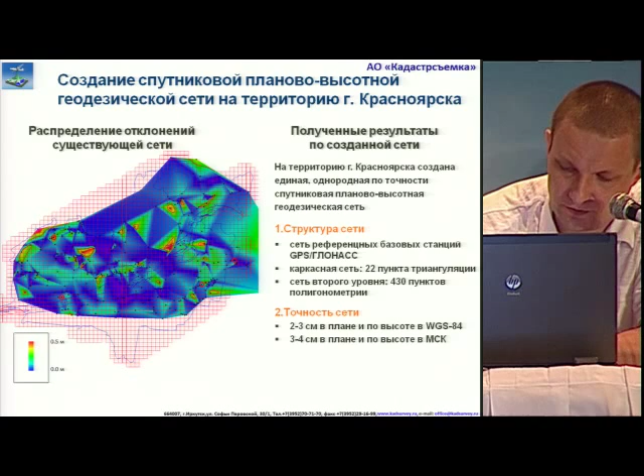To address these tasks, several activities were carried out. Initially, a satellite-based height model was created for the city. So this started with creating and making orderly the geodetic network. We can see the area distribution of ground control points. There were only 450 points, including 22 third grade points.

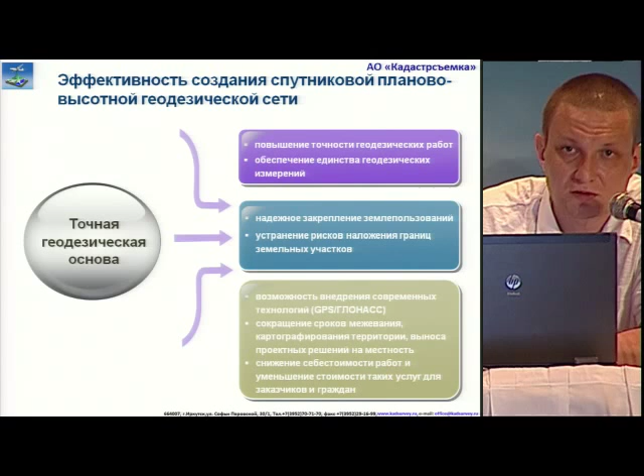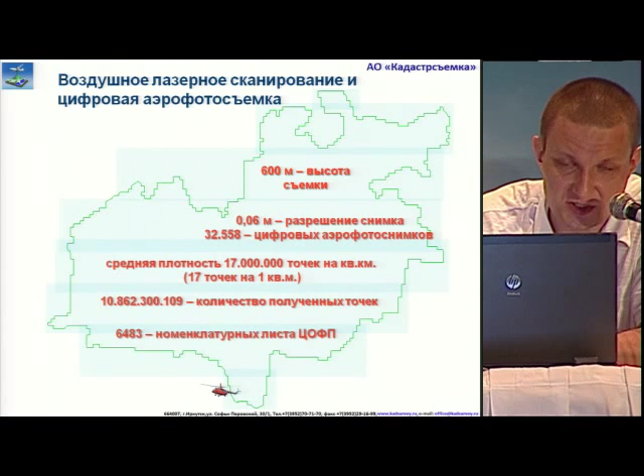So creating a single geodetic basis enabled better accuracy and quality of all geodetic efforts, reliable securing of boundaries of parcels of land based on GPS GLONASS technology. Aerial laser scanning of the city was carried out at a height of 600 meters. 6 centimeters was the resolution. Over 17 million points per square kilometer on average. So nearly 6,500 map sheets were generated.

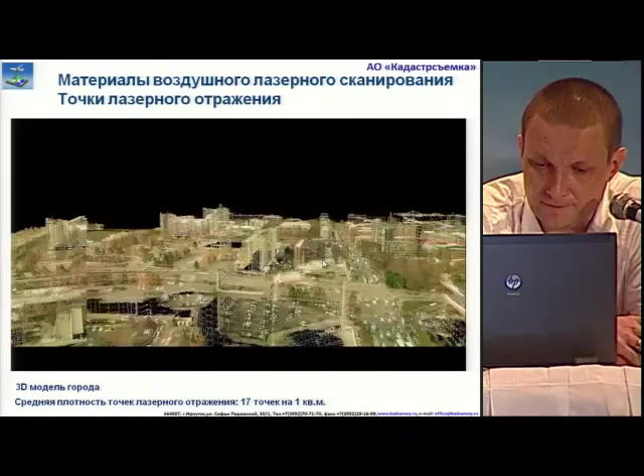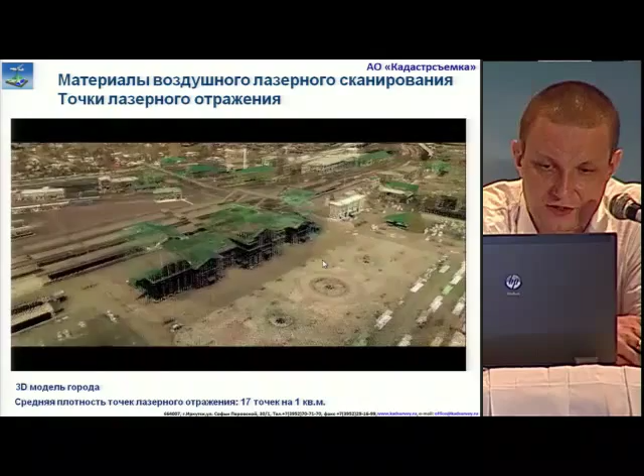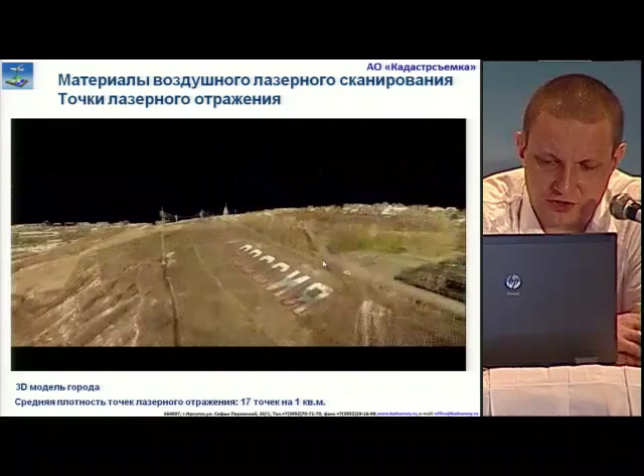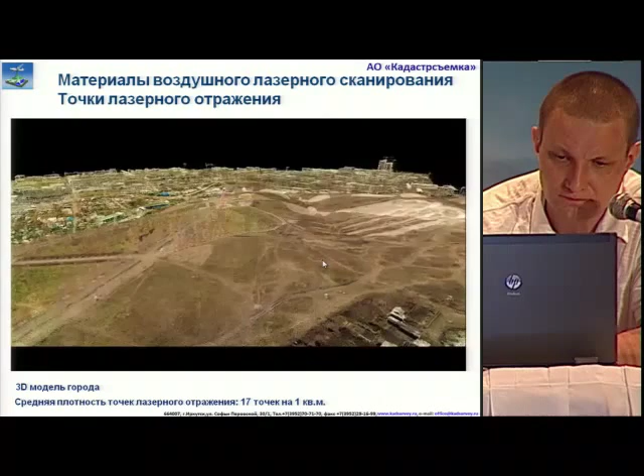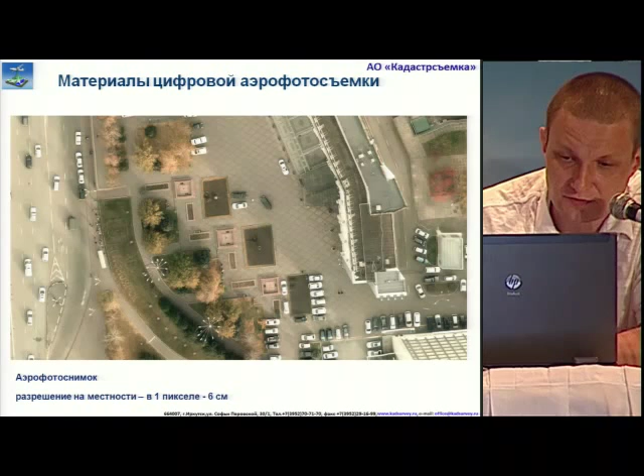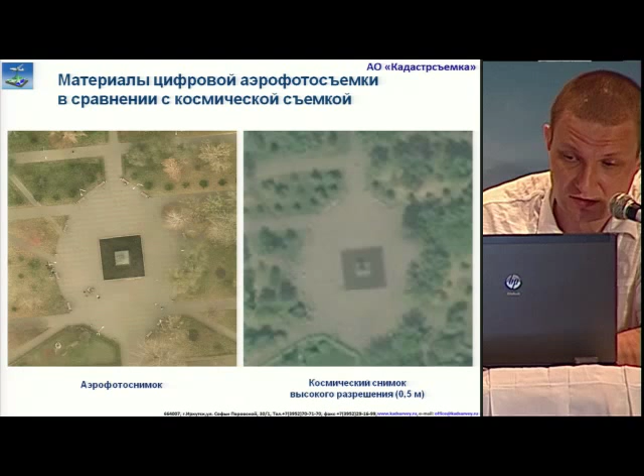Here you can see examples of the actual aerial photos with a 6 centimeter ground resolution. And as a result, you can compare it with the satellite imagery. Aerial photography proves to be more informative in that respect. We built a digital elevation model for the whole town based on the materials of the laser reflection. We built orthophotos, and everything needed to be done very fast, and these materials became the foundation for the development of the new main plan for the town of Krasnoyarsk and for road network development.

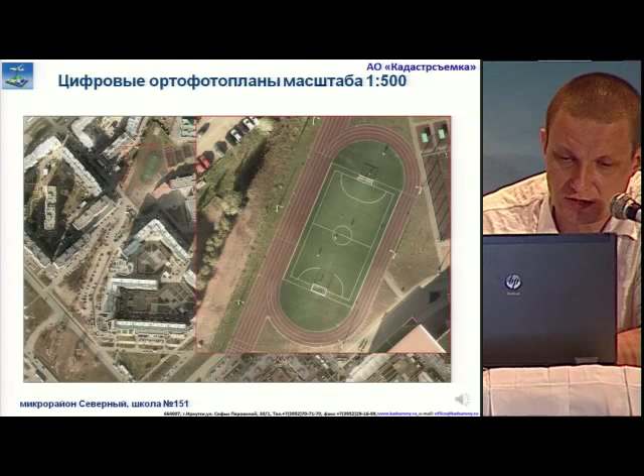That is why we built the orthophotos and sent these orthophotos to design institutes, and then we built the digital topographic maps and 3D city model. Here you can see the resolution of images. Again, it was the last stage of our project that we did, the true orthophotos.

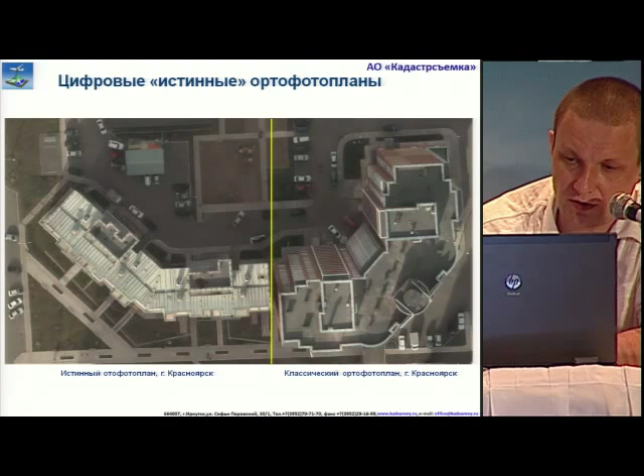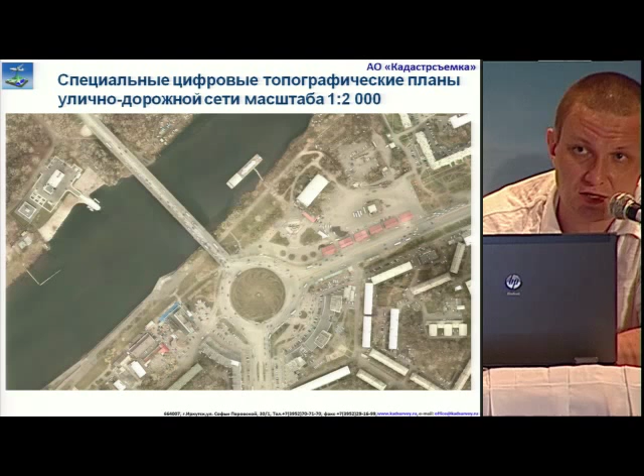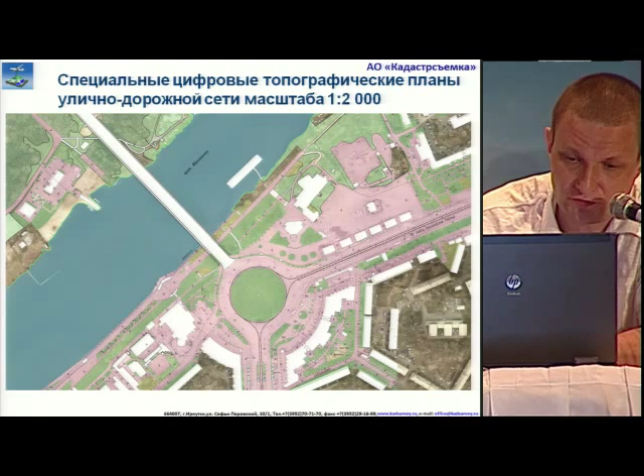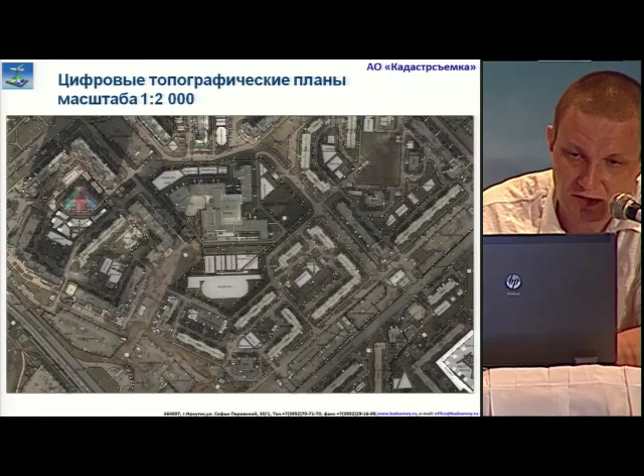You can see the difference of the same image, same plan, and our main task was to provide the accurate cartographic basis for the design of the planning of the city, and for that we developed first a simplified plan of the road network and topographic vector, so that design institutes could make decisions about how to design new roads and highways. After that, the topographic plans were augmented with the elevation and everything.

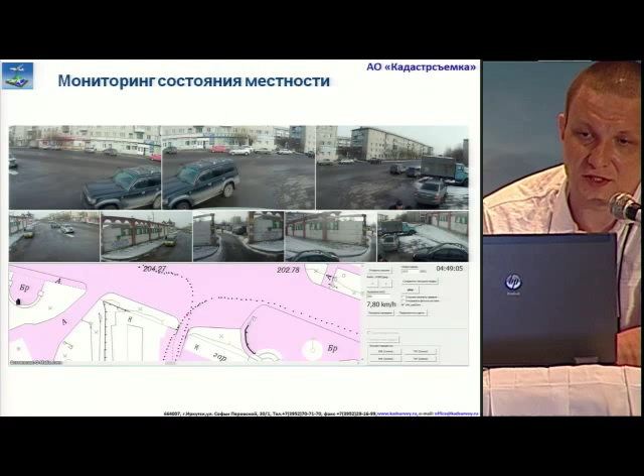As Krasnoyarsk has quite an interesting relief with different altitudes, which can cause certain difficulties during the interpretation, we used panoramic video imaging with an 8 camera setup, went around the city in the densely built area so that we could use these materials during the interpretation stage. Also, we built a 3D digital terrain model. This is a vector model.

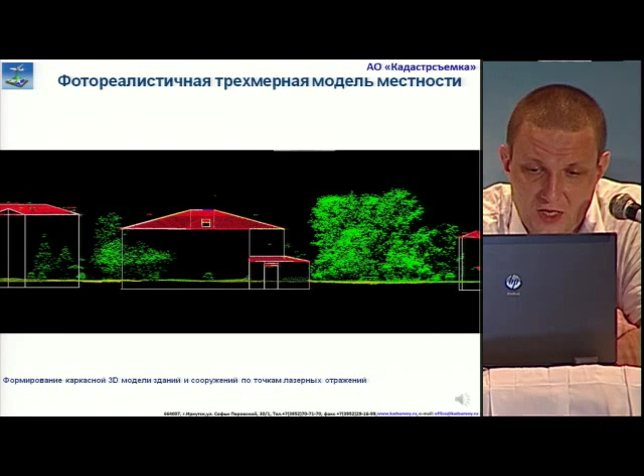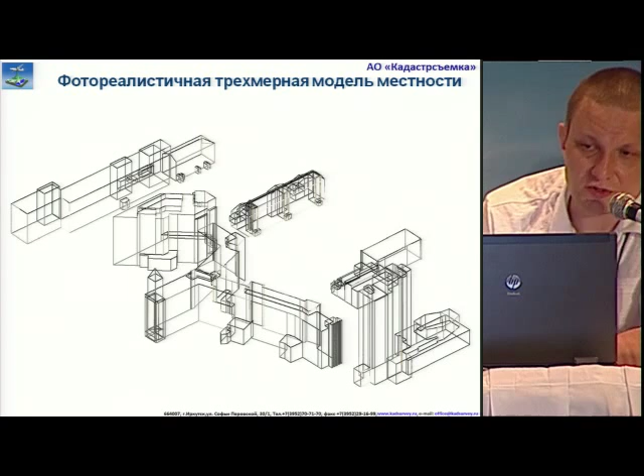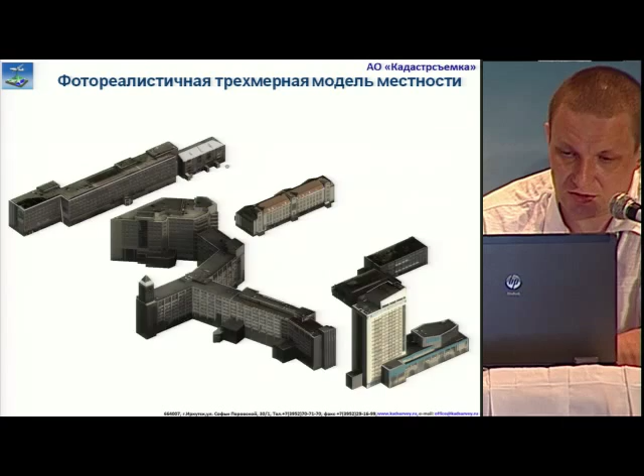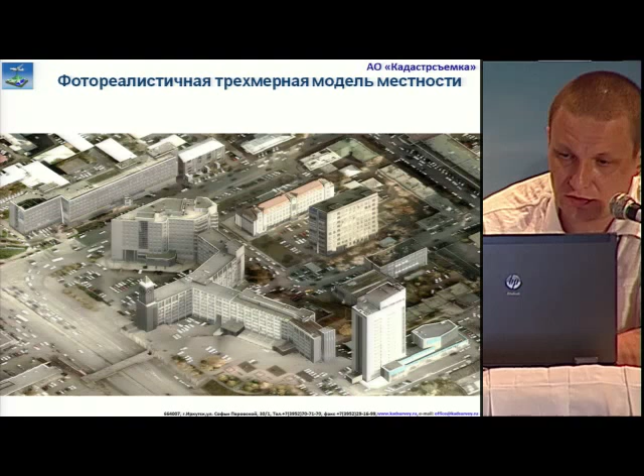In stereo, we digitized the roofs of houses in Photomod, and after that we built the structure models, including small architectural forms, for 2/3 of the area of the city. We built a 3D model for all the high-rises that we have. All of them are metrical, with accurate referencing. All of the objects are in coordinates, and you can work with them. Again, this was used by architects during the design of the main plan of the city. These red lines, for instance, they looked at and saw how they can build new houses, what these houses would look like within the existing model.

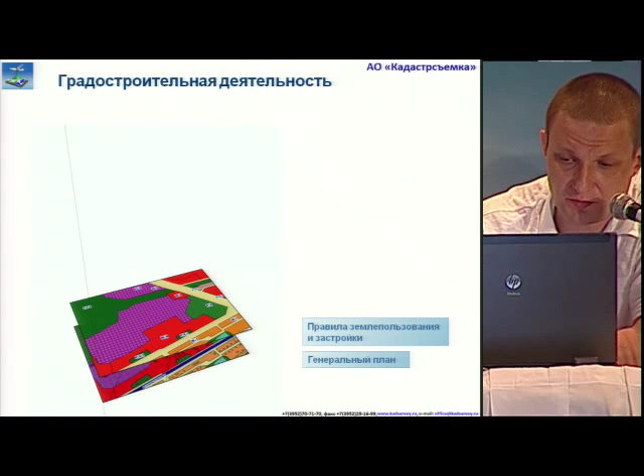And as what we built became the foundation of the currently developed city GIS, the city used this to address their current challenges on how to design the area. Now they're actively using it, and applying it for other projects. Now we have different layers for different buildings, layers of engineering communications, roads, topographic plan based on the newly developed plan of the city. And based on these materials, we developed new land use plans.

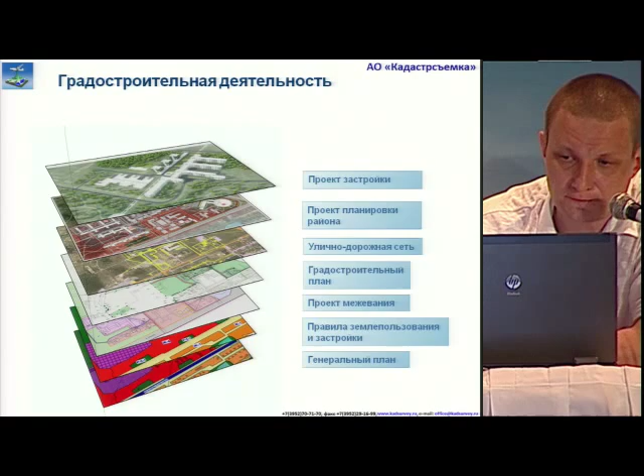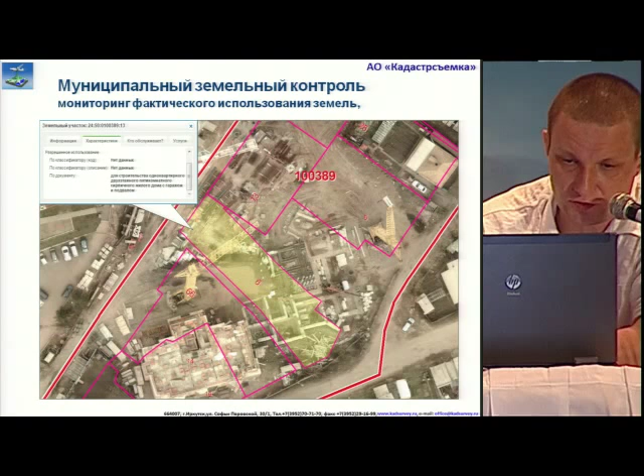They're working on boundaries and urban development plans, road network development, planning of the area, and new construction sites. Also, owing to this new updated information, they monitor the use of lands. We see some of the lands are not properly administered, and within the same project, they monitored what happened in 1 year. We see some of the areas with active construction, for decisions by the government on what needs to be done there. They look at whether they had a planning permit or things like that.

So the main areas of application for the single geodetic foundation would be, first, urban development plans and documents, architecture of the construction, monitoring of the urban environment, land control, some routine checkups. So this is also the foundation for new design and development work and overall management of the municipality. Thank you. That would be the final slide.

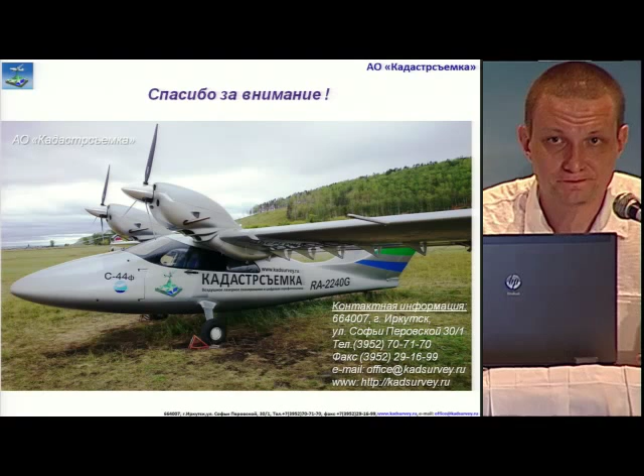This is our most recent acquisition, specifically designed for aerial photography.

Thank you very much. We'll take only one question. While the questions are being prepared, I will ask a question. What time did you take to do this project? The whole project took a bit more than 1 year because there were a number of products that we generated. It took us longest to develop digital topographic plans. Up to 30 people were involved in that, and other stages took different time. Rectification took us some time.

What about the underground network? Underground was not involved in this. Underground communication is a separate event which costs a lot in terms of investigation and mapping. Then later on, the land user services put them on the map.

But another question: the 3D model that you acquired, where did you export it to and where did you process it? And what is a 3D database for you? Do you have any form of classifier? What subsequent steps were taken? 3D models were prepared in AutoCAD, standard for most of the design institutes. They work with AutoCAD. According to classification, these 3D models were standardized with SketchUp and others. We didn't develop anything new for that.